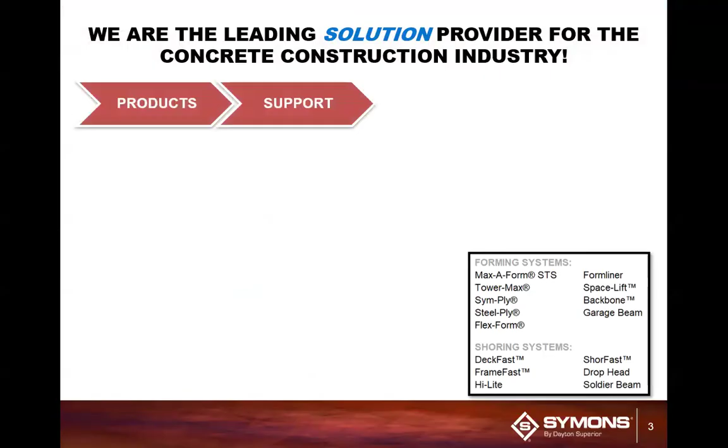As you know, we are the leading solution provider of the concrete construction industry. We deal with products, support, engineering, and training, and a fight song for those of you - thank you, Tyler. Go Iowa. So we handle the products, accessories, chemicals, forming. We're going to be talking about Max-A-Form STS, and I let the cat out of the bag, or Tyler did. Tyler Shaner is going to be talking to us a little bit about that product, because Max-A-Form's a pretty big product, but it is awesome, and we're going to show you how it's done, show you some application videos.

Let me tell you a little bit about Mr. Tyler Shaner. He is Dayton Superior, or I should say Symons, Director of Engineering, Forming and Shoring, and is one of our top product experts for Symons. He really is. He has a BS in Civil Engineering from Iowa State - couldn't really guess that from that fight song cell phone call that you just got. He also has an Executive Master's degree in Business, so at least he can talk that portion with me, because I have two civil engineering brothers and don't know much when they start talking to me about that. He is here to talk to us about all of those aspects. He's been working in this industry for over 29 years and is a fantastic resource for forming projects, products, as well as engineering services. So take it away.

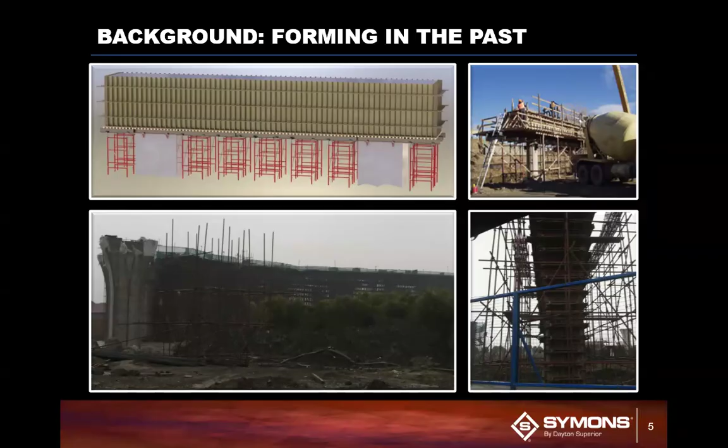So to start off, I'll talk a little bit about the history and why self-spanning came into play. In the past, for spanning concrete structures, large structures like that, ended up with a lot of wood formwork, cap beams, large beams, and typically they're custom in there, and a lot of shoring involved. You can see the bottom left picture there, it's kind of hard to see, it's dark, but there's a lot of shoring underneath there. So you can imagine a lot of labor, a lot of time, a lot of cost involved in that type of formwork at the time. But there really wasn't another way to do it.

In the mid 80s, you started to see all steel formwork that allowed customers to self-span, meaning they could go from column to column, greatly reduce their need or eliminate their need for shoring or custom equipment, and allowed the contractors to gang these into one big piece and set it as one big cap. Obviously, that means improved efficiencies, a lot lower costs, less labor, and so on and so forth. So really a big advancement there in the forming industry.

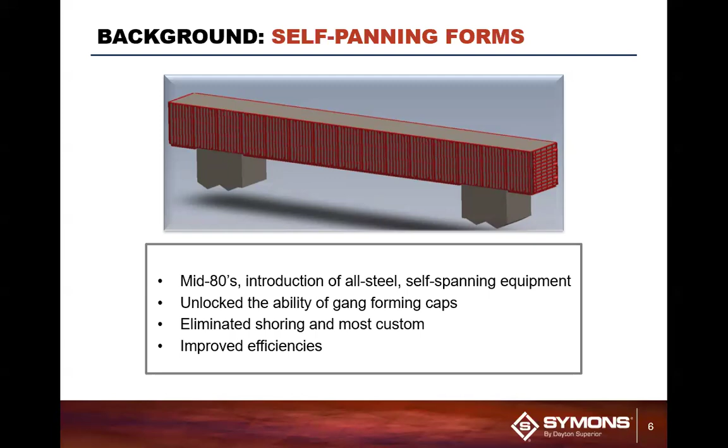Recently, in the past decade or so, we've started to see concrete structures get bigger. Architects and engineers decide they want to make things bigger, stronger, span a lot further - bridge caps, power plants, turbine pedestals, that type of thing. They're just getting larger, and what happened is you're starting to get back into the need of shoring down to the ground or custom equipment, heavy duty shore frames. And we're right back to adding labor, adding time, cost to job sites.

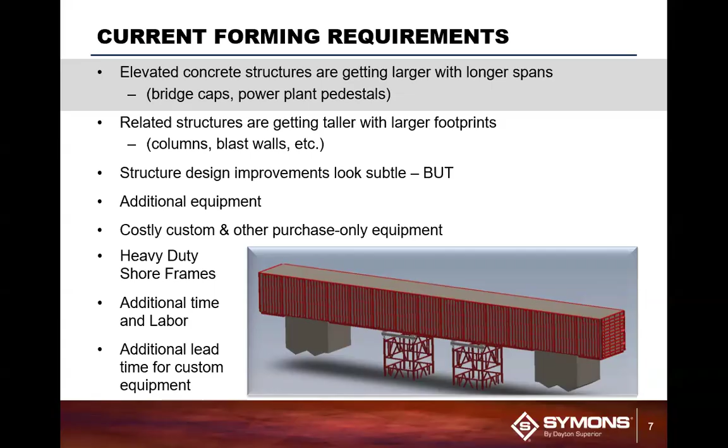So that caused us here at Symons to take a look at our current self-spanning system, the Max-A-Form system, and see what we could do with it. The advancement that we did from Max-A-Form to Max-A-Form STS got us back to this look - greatly reduced or eliminated the need for shoring, got rid of a lot of custom equipment. So we're right back to reduced cycle times, reduced lead times because it's standard equipment, and really simplified how you go after these self-spanning applications.

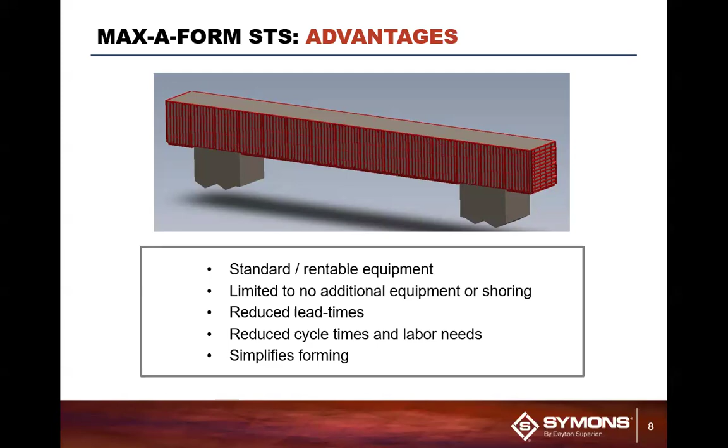So we basically jumped ahead a little bit to try and get ahead of the design phases that the engineers and architects were doing. A little detail on the advantage of STS and what it does for us - the new design has about 30% higher moment capacities, or self-spanning capacities, as well as pour pressure ratings. You can see some of that detail to the right - the shaded area is the older Max-A-Form with the face sheet. So we're comparing the old style Max-A-Form to the new style STS, with the 3/16 face sheet going to 1/4 inch. The pour pressure, anything from 2 foot wide up to 8 foot wide, went from 1,500 to 2,000 pounds per square foot maximum capacity. You go above that 8, 10, or 12 foot, they do come down a little bit, but again we still gained a good 30% plus in capacity.

The deflection - we were able to maintain our deflection under L/360 at rated loads. And we did test that at University of Illinois under full pressure to verify that. So it has been through that testing phase, as well as out in the market, for a better part of a decade.

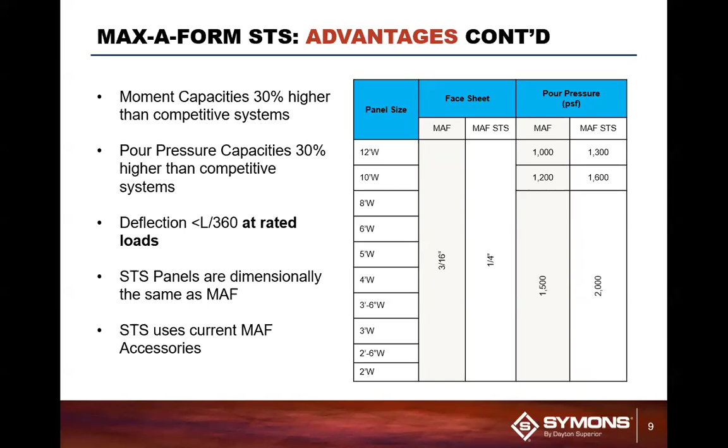A big part about that as well is that we did maintain dimensionally - it's the same as the old style Max-A-Form. So that means a lot of the accessories fit right up to it - no need for a lot of new accessories on the system. I'll show you a little bit here in the next few slides of some of those accessories due to the loads that we're seeing that we did add to the system.

A little look at the panel itself - again, 3/16 to a 1/4 inch face sheet, the steel face sheet. We went from what was called a Z stiffener to an L stiffener, so a simpler stiffener, a simpler load pattern, as well as we added some continuous backup stiffeners on the back side of the panel to help control our deflections and reduce the amount of area for the deflection. The weight in the system did come up slightly, but again, we're talking about a panel and a system that is handled by crane - you're not going to be hand setting this system.

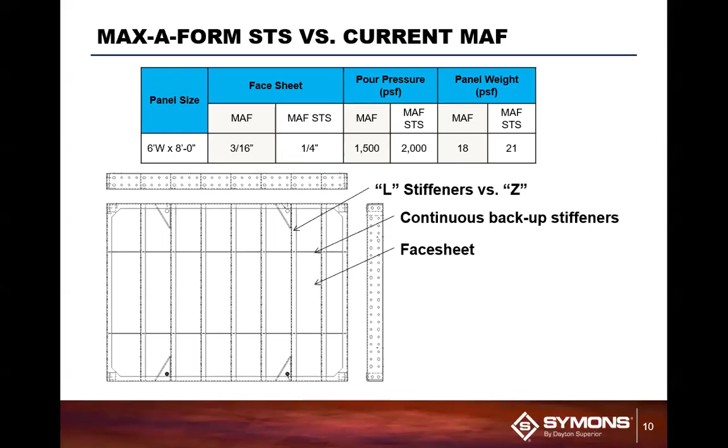Unless you're Hulk Hogan. Yeah, Hulk Hogan, maybe. Who's mad?

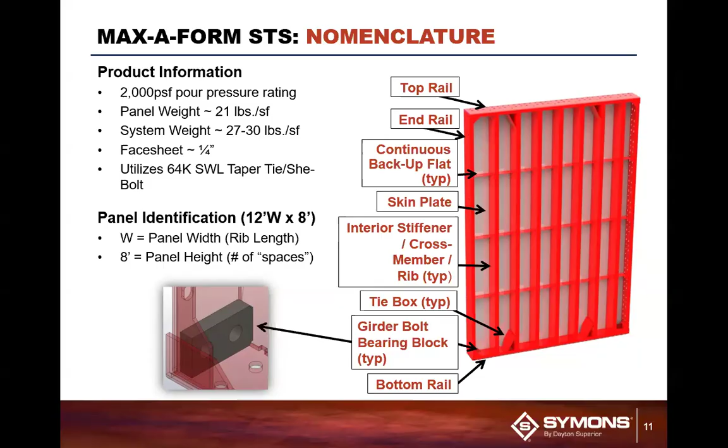Something we did with the design for manufacturability and consistency of panel quality is include tab and slot technology. A lot of the parts have a tab and a corresponding slot that tab goes into. In this case, you can see the rail on the outside, there's a slot put into the face sheet for that. There's also slots throughout the grid in the face sheet that will take the interior stiffeners.

Down at the bottom, you can see we also laser in the tie holes. We put those on one side of the form as standard when it comes out of the plant.

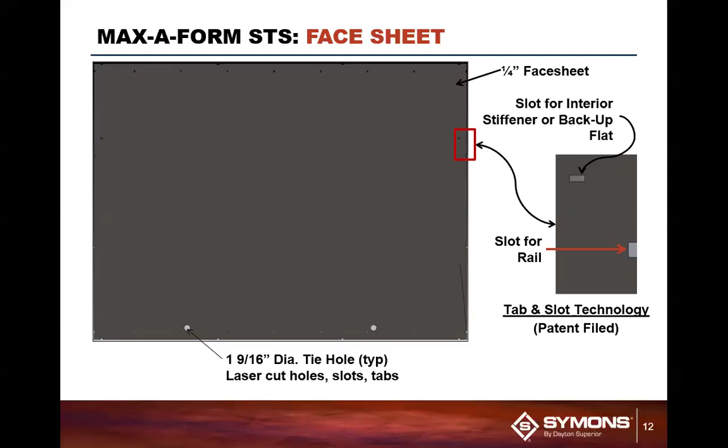A little bit more, you can see here the top and side rails. To really stiffen up the corners, our top rail wraps around the corner on top of the side rails. This also includes the typical tab and slot technology.

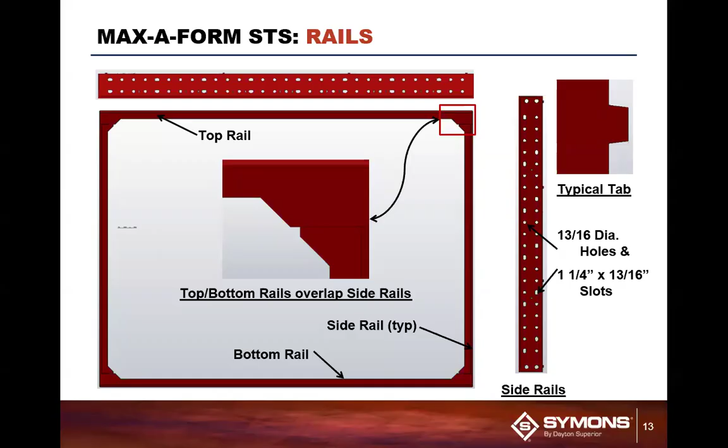Here you can see a picture of how it goes together. It really simplifies how it's produced. This locks all the parts into place even before it's tack welded or finish welding is performed. You can really see the slots and tabs and the corresponding members.

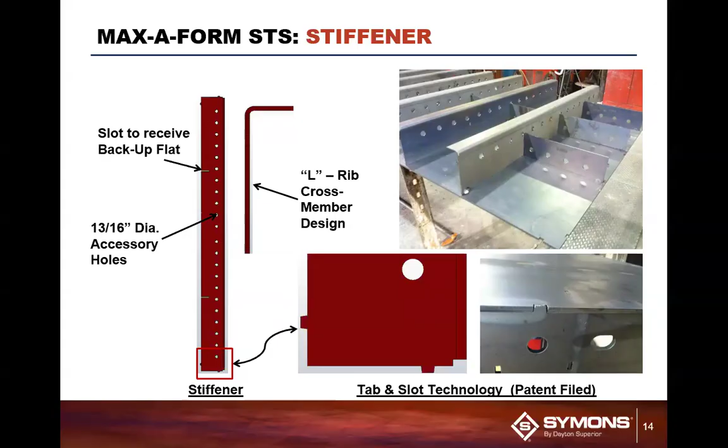Little details on what makes this work. You can see the tie box on the bottom left, the triangular shaped plates we use for the tie box and the hole, and the girder block placed into the four corners. That's where we place a larger bolt, which I'll show you in a minute, and that's what helps generate our moment-to-moment connection, or our self-spanning capabilities of the system.

What you're seeing at the top is a look at that backup plate I mentioned to help bring our deflections down. You can see that also includes slots where all the stiffeners are going at 1 foot on center, so everything just kind of locks into place.

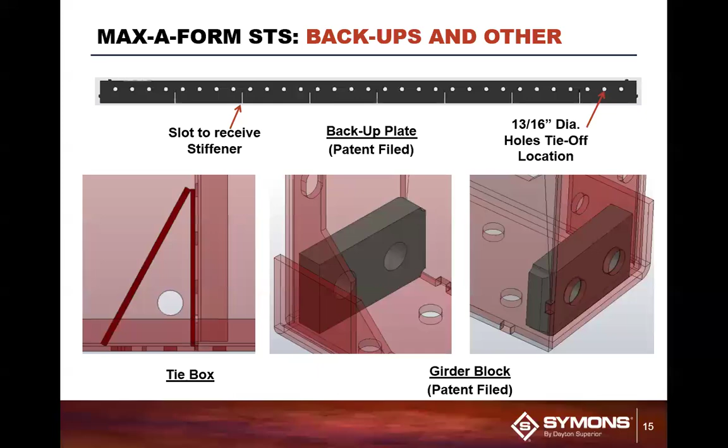Anything 2 foot W to 7 foot W is 6.5 inches thick, so that's how deep the panel is. The 8, 9, and 10 go up to 8.5 inches, and the 12 foot is a large panel, just over 10.5 inches thick.

Our standard lengths within the fleet are 1, 2, 4, 8, and 12 foot for the majority of those widths. However, we can produce a lot of different lengths as well. It's really limitless as long as we know what we're producing for a non-standard application, typically a purchase for a project depending on what it is.

We also have 2 foot 6 inch and 3 foot 6 inch wide panels, by 1, 2, 4, and 8 foot lengths. You see those a lot on soffits and columns as well.

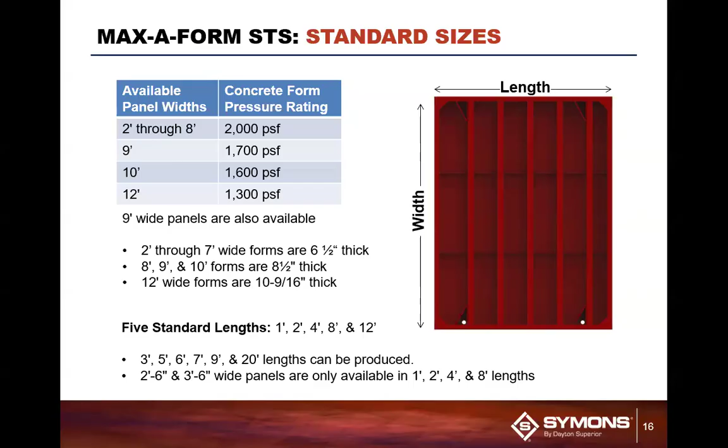Tie locations - what you'll see in some of the pictures coming up. STS is a fantastic system when you want to space out your ties or do a column. The system and panels are designed to carry a load for that width, whatever the W is. So if it's an 8 foot W panel, it's designed to span that load end to end, 8 foot. In this case, you can see these panels laid out, the W going vertically, and our ties are spaced 4 foot across horizontally.

You can see your different sizes - a non-standard 20 foot long panel, but your tie spacing starts at 2, and then every 4 foot. Your 12 foot starts at 2, every 4 foot from there. You can see the different lengths of panels across there.

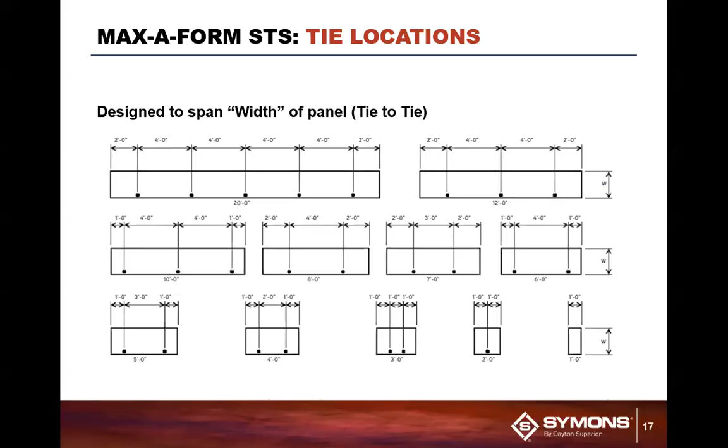Some of the accessories we added due to the higher pressures - we changed the outside corner to a 4 inch by 4 inch by half-inch steel angle, standard steel angle. You can see that there.

The girder bolts I mentioned that allow for the self-spanning go into the girder blocks I showed you a couple slides ago. That's a 1 inch by 4 inch A490 - that used to be an A325. We upgraded that due to the tension load that goes through the bolt when we bolt the panels together and put them into a self-spanning application.

We also have a handling hook for when these panels arrive on site to help with shakeout and move the panels around off the truck. You can see on the left a bit of a look at horizontal application - this is when you want to span your ties out a little bit. You can see where that individual is standing, that's your rib or cross member, so that form will span all the way across, whatever width that is.

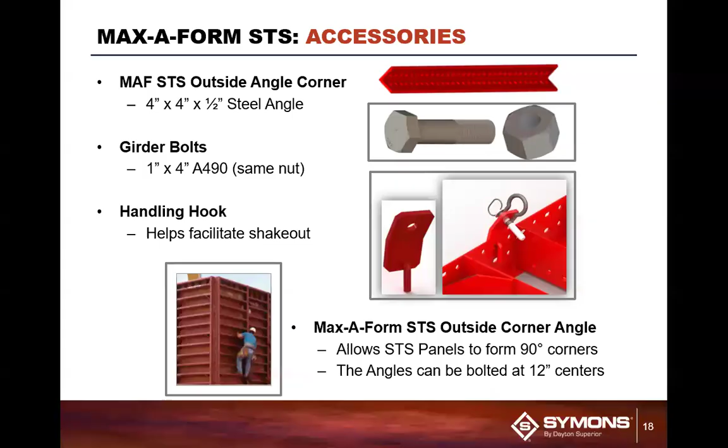I'll show some pictures of columns as well, that has to do with that spanning of that wall and doing it tieless.

We also upgraded the tie systems due to the 2000 PSF rating. So we now have a standard, what we call the super taper tie, which uses a 5x7 tie plate with 32 millimeter threads on either end. It's a taper tie of 1.25 to 1.5 inch, and it handles 64,000 pounds safe working load.

We also have a super she bolt. Its standard capacity is 56,000 pounds safe working load, but when needed we can get that up to 64,000 pounds as well. It utilizes the same 32 millimeter thread, 5x7 tie plate. So those are standard in our rental fleet.

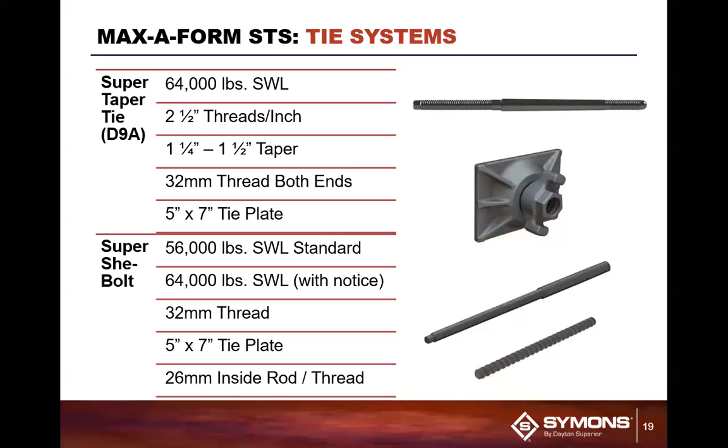This was a great, very exciting addition for us, thinking back to the added weights coming from these larger structures. We developed a standard 300 kip support system, which is a standard rentable item designed for the markets we have today.

The only purchase items you'll see, and I'll go through all the parts for this system, are the embed tubes, a plastic cap, and shim packs that are used with it.

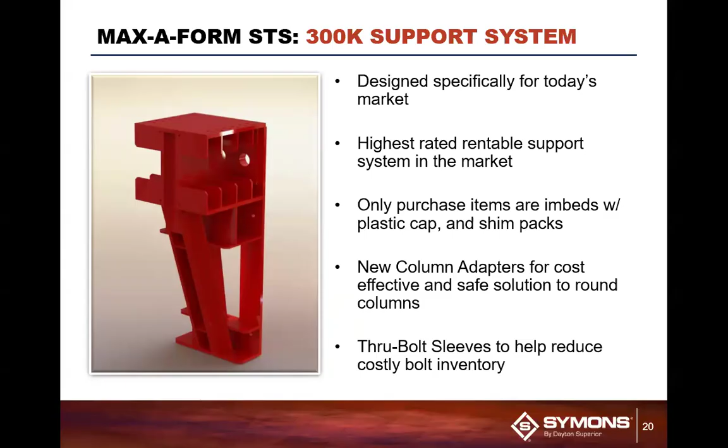Where do you put this thing? That goes on the columns. I'll show you a picture here. So there's a couple of pictures here, a round column on the left.

Something we added with this system were some column adapter brackets that allow us to handle that radius of a round column, anything from 6 foot all the way up to 11-foot diameter. We have 3 different sizes that handle those diameter columns.

And then on the right, a more standard square column look. Everything you can see there is rentable except for the embed tubes and the plastic cap. Everything else is part of our fleet.

Another item we added were the extension tubes, 6-inch, 12, 24, or 36-inch. Those can be placed on the threaded side of the through bolts, so we can greatly reduce the number of different lengths we have in through bolts.

We simply slide on one of those extension tubes and then put the nut on the outside and thread it down. That way we have 3-4 different lengths of that rod versus 15-20 in the fleet.

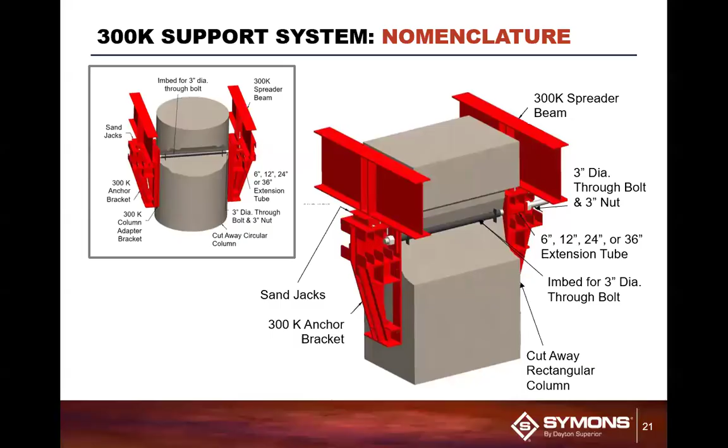Here's the main parts of that 300 kip system. You can see the bracket up on the left, it's a very large bracket, standing about 5 foot 4 inches tall, so you can get an idea of just how big that bracket is.

The column adapter has 3 sizes, as I mentioned, handling anything from 6 foot diameter up to 11-foot diameter. There's a 300K sand jack on top for releasing the load, a spreader beam, and our 3-inch diameter through bolts and nuts. The embed tube and the cap on the bottom right are purchase items; everything else you see here is rentable.

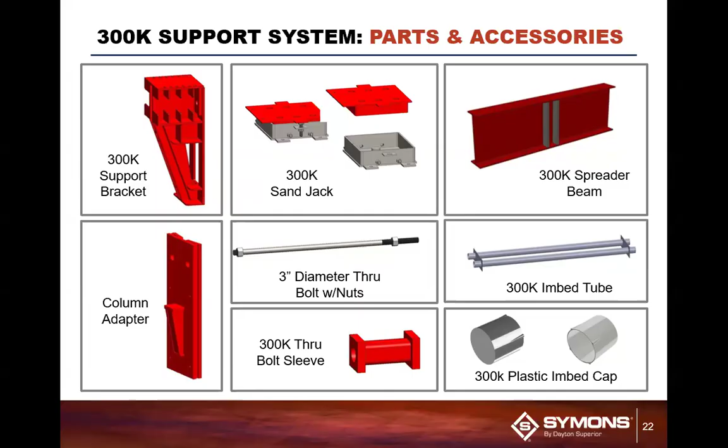So that's the system, a really quick rundown of the main parts. Now we can take a look at the actual system in use on some standard applications.

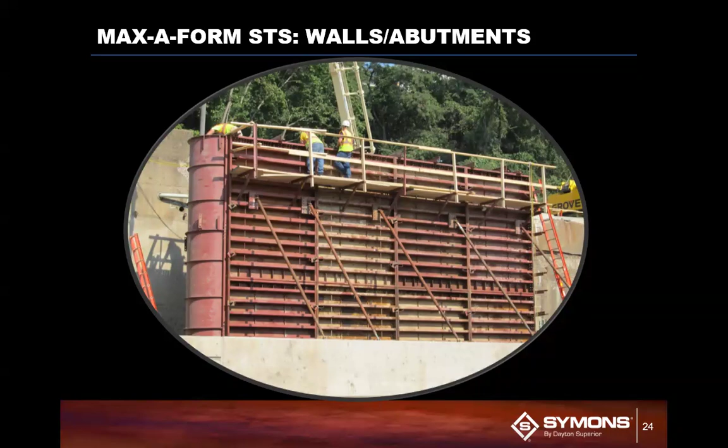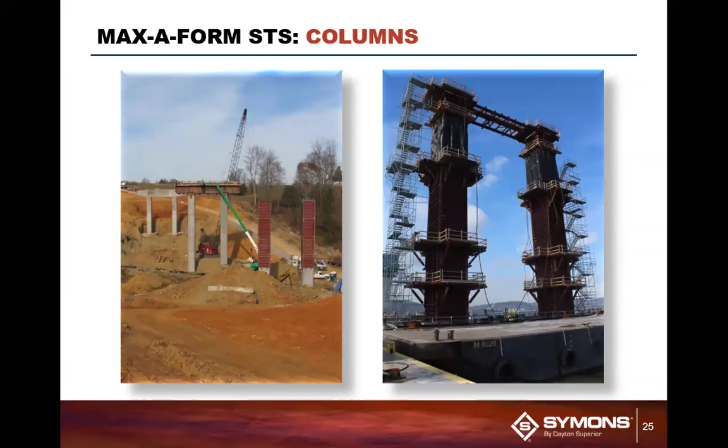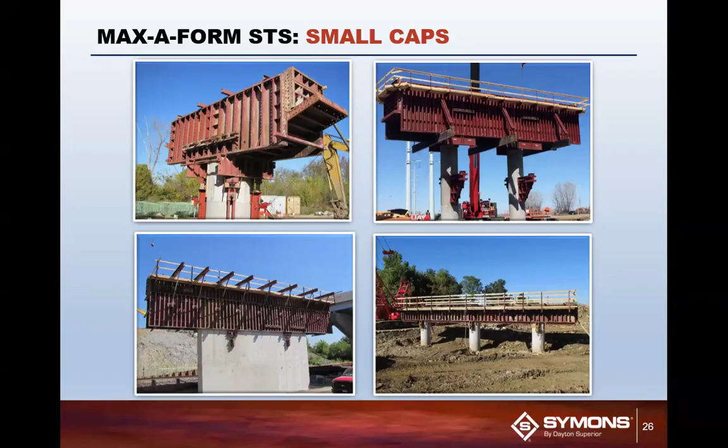A hammerhead application on the top left. For the soffit, we've got a standard STS panel coming up that we bolt into the sides of the panels as well. On the right side, upper right, you can see an offset support bracket down at the bottom. We're actually using a smaller W, probably a 2W STS for wind beams, and our standard soldier for the braces on that one. The bottom left is a look at a crash wall, a cap on top of a crash wall. The bottom right is just a smaller multi-stem cap. So those are some smaller applications.

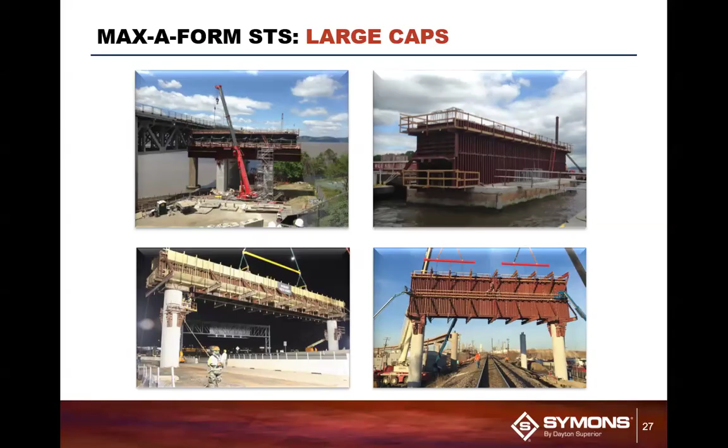So I got a question here. Is the 300K the standard now, or are the other smaller 70, 140, 150 spreader beams able to be used with the STS? Yes, we still have all of those. So 300 kip is a standard rentable item, used when we have to have that type of loading, that type of support. The other, your 40K, 12K, 70K, 140K, all of those are still available as well. We developed a 300K and put it into our fleet because of the loading or the load cases we are seeing coming into the market. The higher loads warranted the higher capacity bracket, but we still have all of those others.

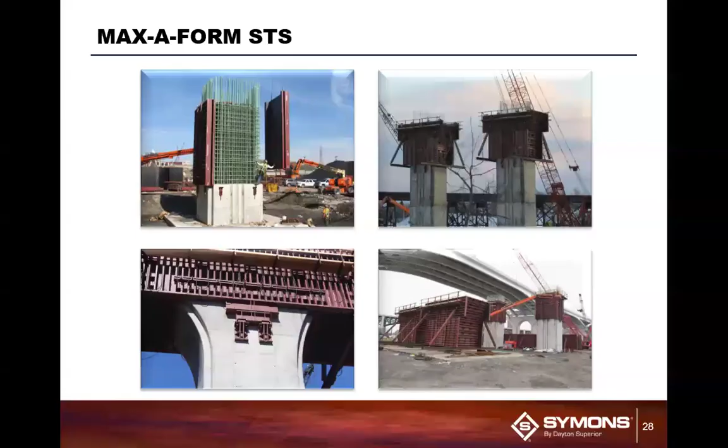So do you think that's normal to need that more often than not? We've seen it, just depends on the application, the size. Some of the smaller caps that you saw there did not have the need for that bigger bracket. But some of the larger ones that you'll see here coming up, definitely we needed that higher capacity, and even one that you'll see here in a minute needed 500K. So that was a custom build.

A couple specific projects: the Grand Parkway project there on the right. You can see the column and the cap, part of the cap being formed at once, and the finished concrete in the background there. On the left, the horseshoe project around Dallas.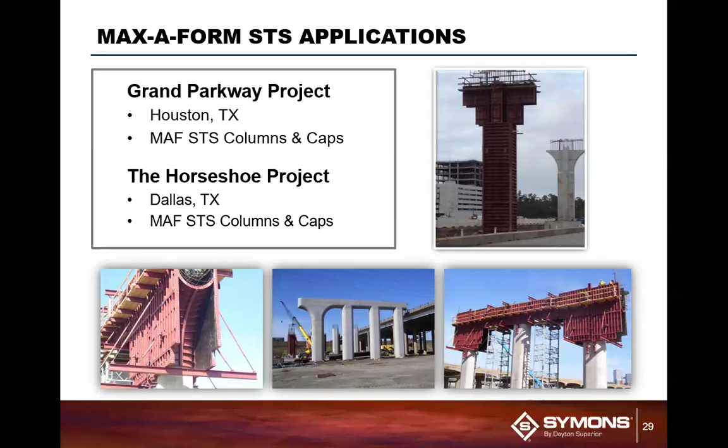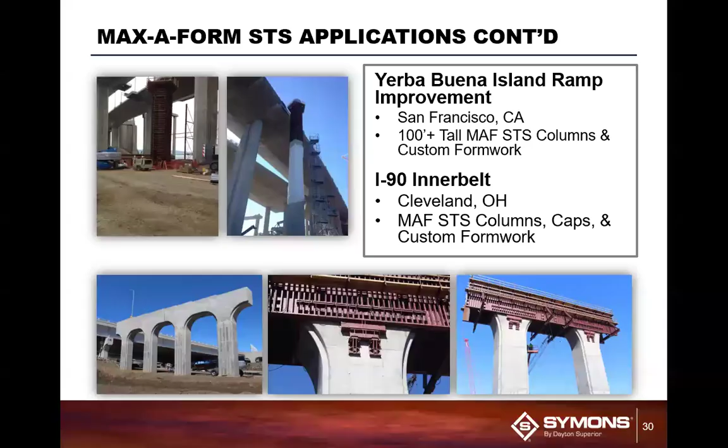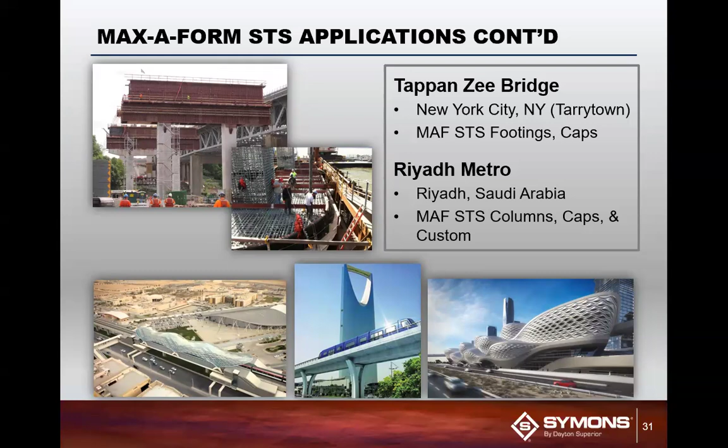So not just bridges, but STS is used all over the place, really. Dams, water facilities, wastewater, water treatment facilities, lift stations. It's very good in the bottom left there for power plants, STGs or coker applications, and really a lot of special applications where we use it.

It can be used in combination with Soldier, as you saw, our Tower Max, our Flex Form, our space lift. We put it on our space lift before. So a versatile product, very strong.

It does have its uses out there where, in my mind, it is the best to use in a lot of applications. And our team is very well versed in getting it on the project and on the right project. So thank you for your time. Really appreciate the opportunity to kind of go through the basics of a great system that we have in Max-A-Form STS.